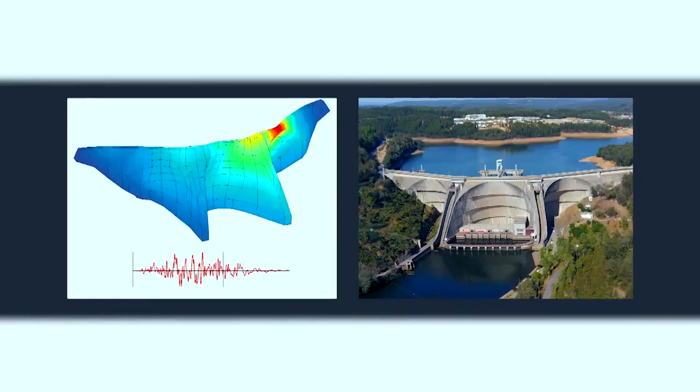The Portuguese National Laboratory for Civil Engineering is a world-renowned research institution founded in 1946 as a state research institute, with the mission of developing applied research in the field of civil engineering and connected areas. Over the last 7 decades, LNEC has conducted research projects and consultancy work in more than 40 countries, in all continents.

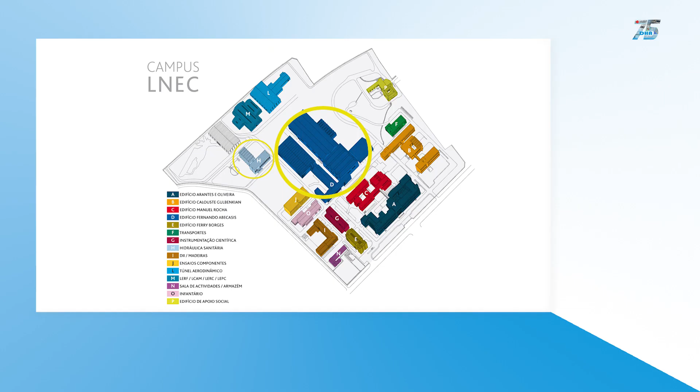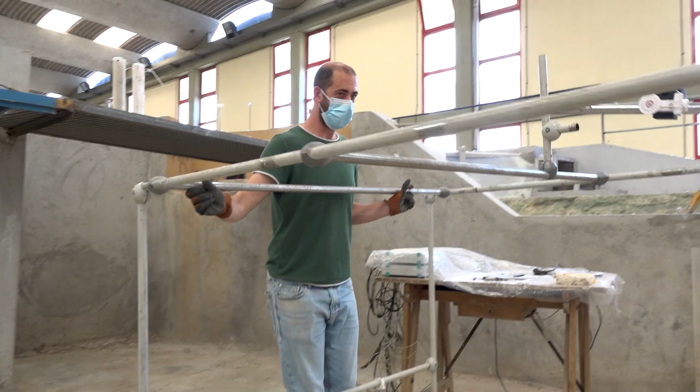DHA, the Hydraulics and Environment Department, was established in 1948. It is composed of a highly qualified team of researchers and technicians who work together to address a wide range of challenges related to the water cycle.

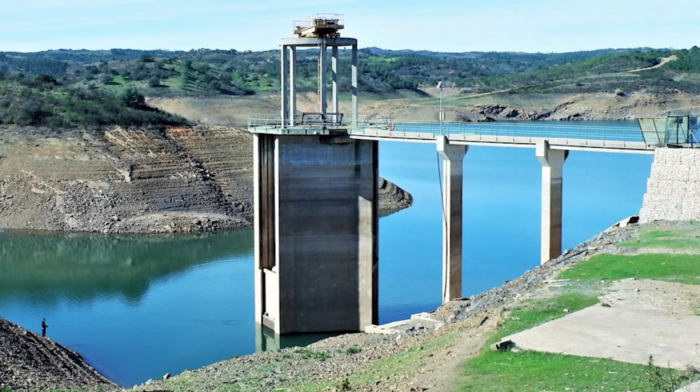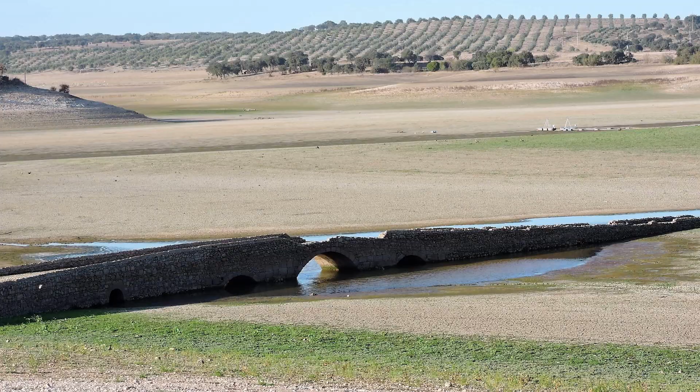Research and consultancy at DHA covers water resources management, coastal management, hydraulic and maritime structures, urban water cycle, groundwater, and information technologies applied to water and environment challenges, aiming to contribute to water and environment sustainability within the climate change context.

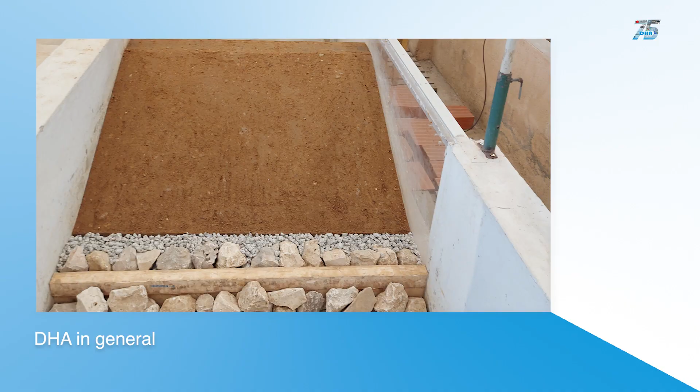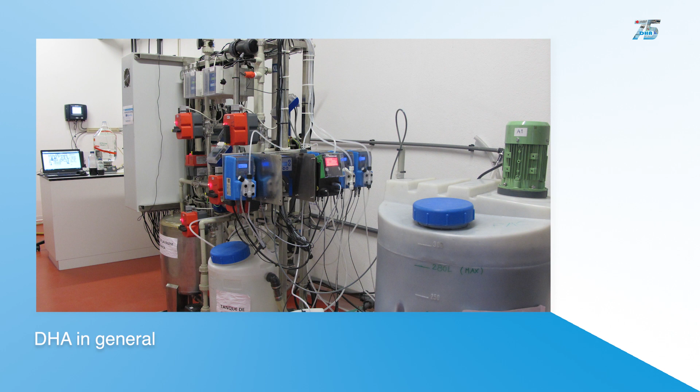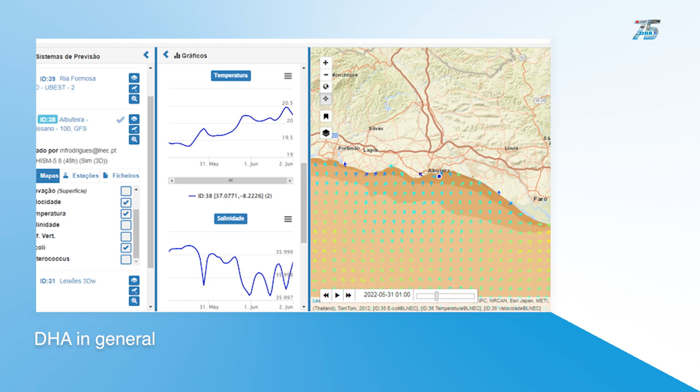DHA holds unique experimental facilities for physical modeling of dams, ports and other maritime, hydraulic, and hydrogeological structures, for water quality characterization, and lab and pilot plants for development and optimization of conventional and advanced water treatment, as well as state-of-the-art research capacity to develop and apply numerical models and forecast systems in all hydraulic and water-related environment fields.

Over the years, DHA has built a world-renowned reputation in the field of hydraulics and environmental engineering, evidenced by a vast number of scientific papers, technical reports, and books in a broad range of topics, and their expertise has been sought after by governmental agencies, water management bodies, research partners, non-governmental organizations, and private companies around the world.

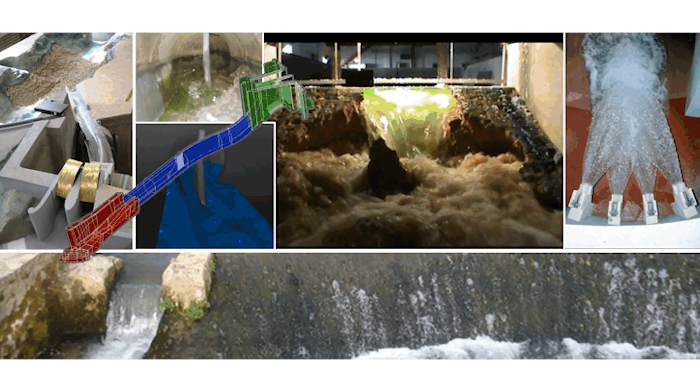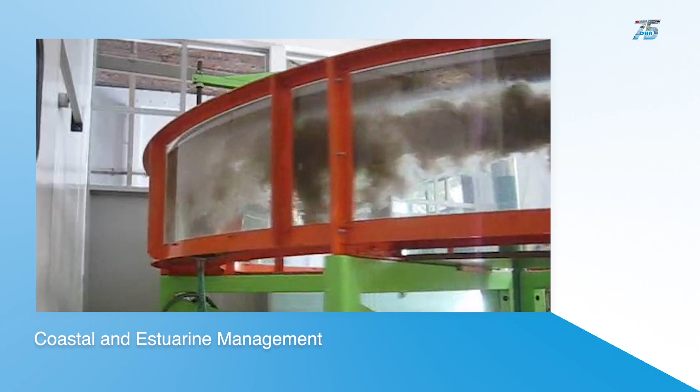Nowadays, the department's research covers a broad range of topics. In the domain of coastal and estuarine management, studies are carried out on waves, tides, currents, sediment transport processes, and biogeochemical processes in coasts and estuaries.

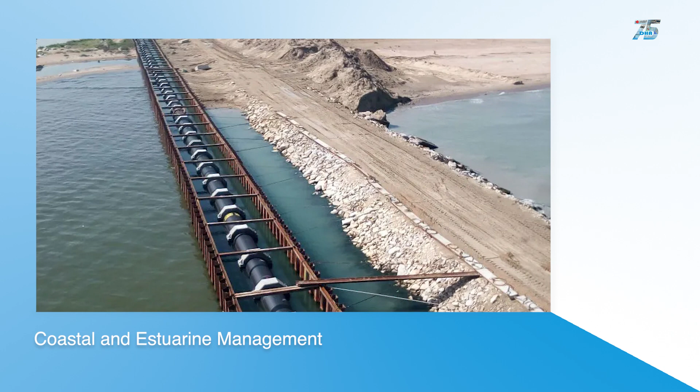This assists in the development of solutions for coastal protection and rehabilitation, management of the coastal risks of erosion and flooding, mitigation of climate change impacts such as sea level rise in coastal cities, stability of tidal inlets, improved design of estuarine, coastal and submarine infrastructure, and assessment and prediction of water quality.

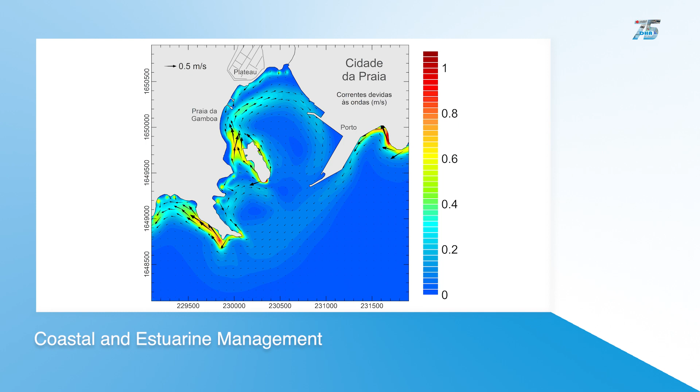These studies are mainly developed using advanced numerical models, supported by in situ measurements.

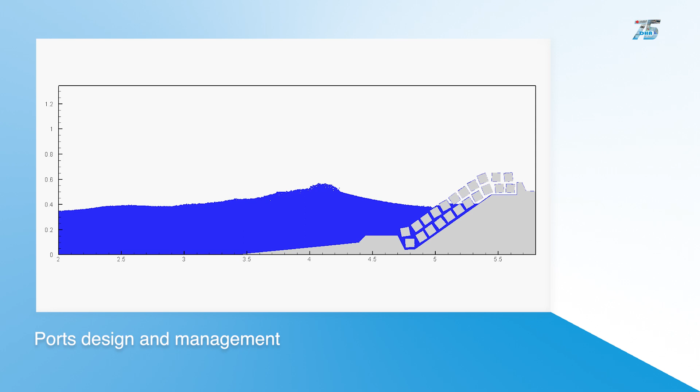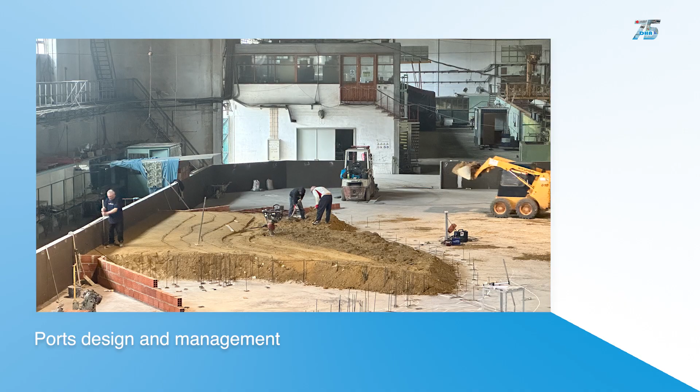Another important area of expertise is the development of effective solutions for the design and management of ports, and the safety of marine transportation. To this end, a huge testing hall with an area of 6,500 square meters, mostly occupied by wave flumes and basins, is used to test under-scaled physical models of wave propagation over real sea bottom configurations and their interaction with marine structures, sediments, and ships.

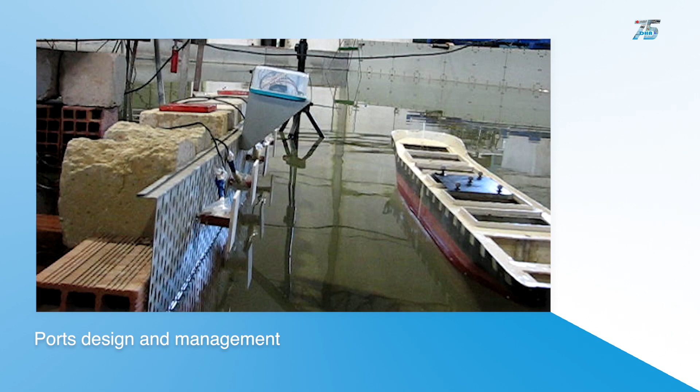Wave generators are used in those flumes and basins to generate the wave conditions that are the main driver for those studies. The facilities also include a large sediment transport flume and several smaller flumes capable of simulating the movement of sediments in rivers, coastal areas, and offshore environments.

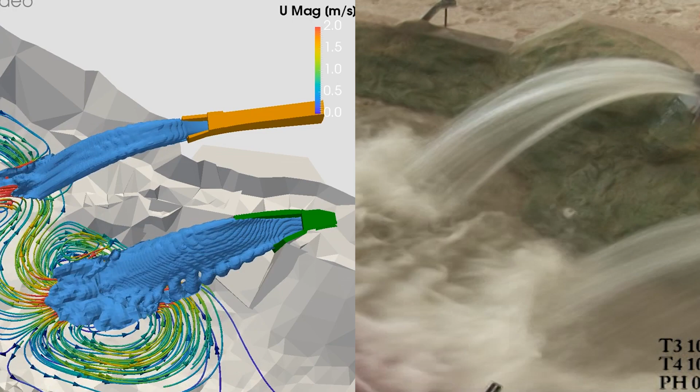Under the subject of hydrology and water resources management, studies of the hydrological cycle, drought and water availability, flood risk management, and the impacts of climate change on water resources are carried out. Also, the development of innovative solutions for managing water resources sustainably is based on advanced modeling and data analysis techniques.

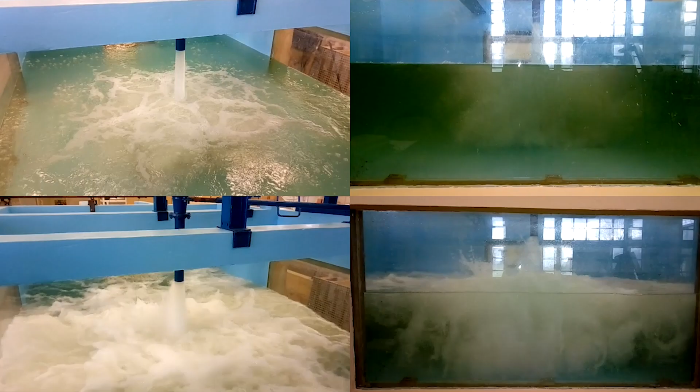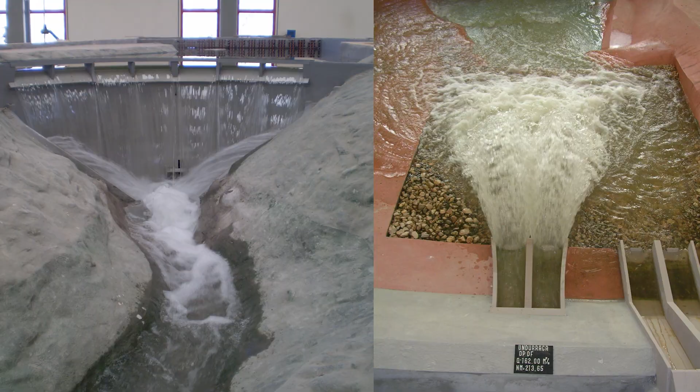Several experimental facilities are used to support these studies, for instance, to study the flow characteristics and its interaction with different types of hydraulic structures, as well as to test the performance of different designs. Several large-scale models of hydraulic structures such as dams, spillways, and channels are used. Those are nowadays complemented with advanced numerical modeling.

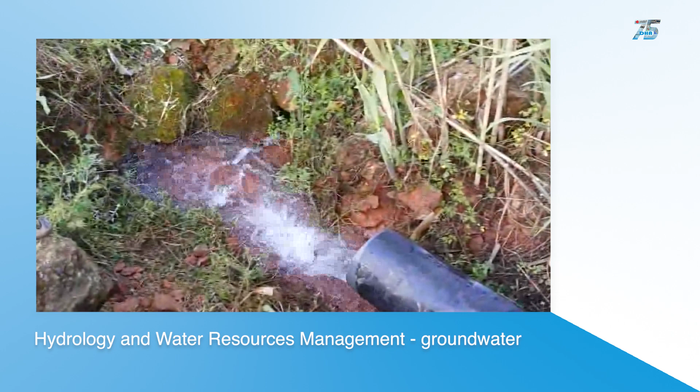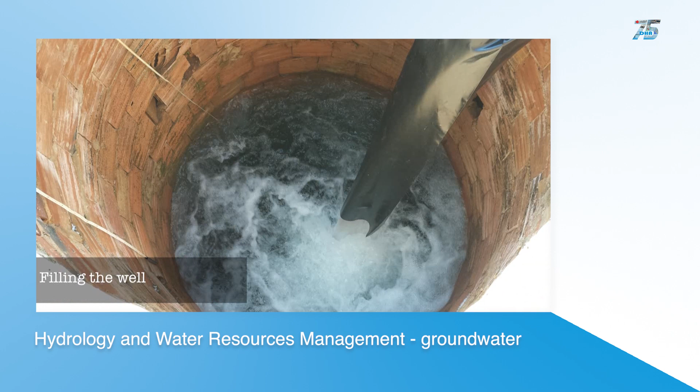Concerning groundwater, several studies are being developed including field monitoring, laboratory soil column tests and large-scale aquifer infiltration and contaminant leaching tests. The structures can also act as a managed aquifer recharge simulator to enhance the quality of secondary treated wastewater during its infiltration through composed soil layers.

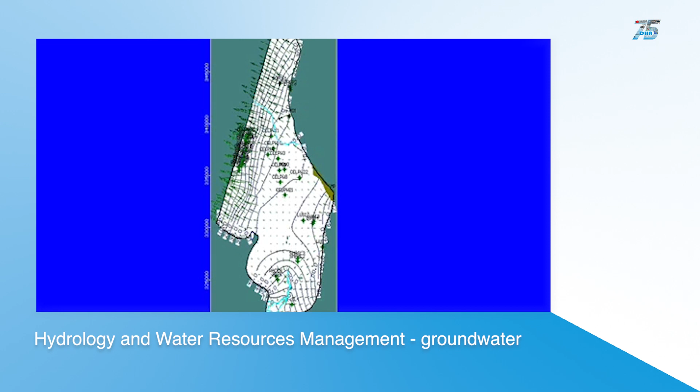Most studies developed use numerical models to interpret the current situation and to model future scenarios, helping to support the management options that lead to a more sustainable use of water resources.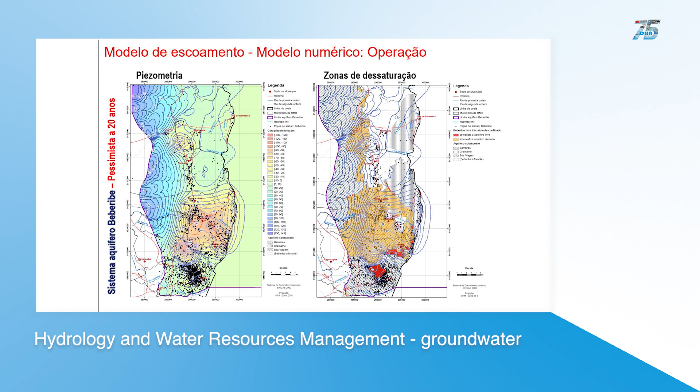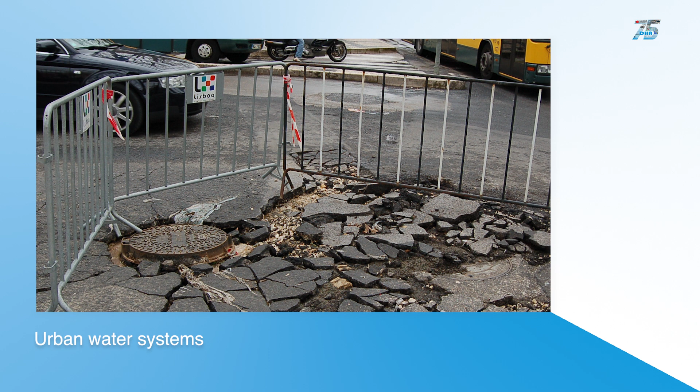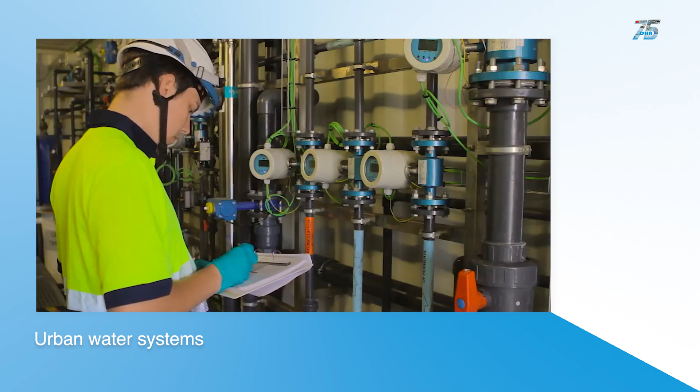The research, development, and innovation on urban water systems has a problem-driven approach in the field of public water supply, wastewater and stormwater services and systems, grounded on 4 research lines: water and energy, infrastructure asset management, water quality, treatment and reuse, reliability, safety and resilience of urban water systems.

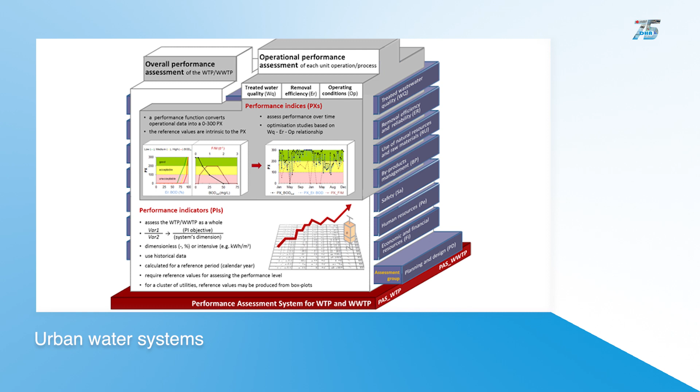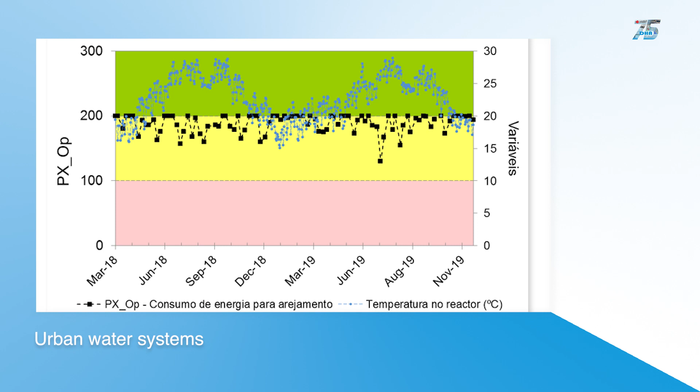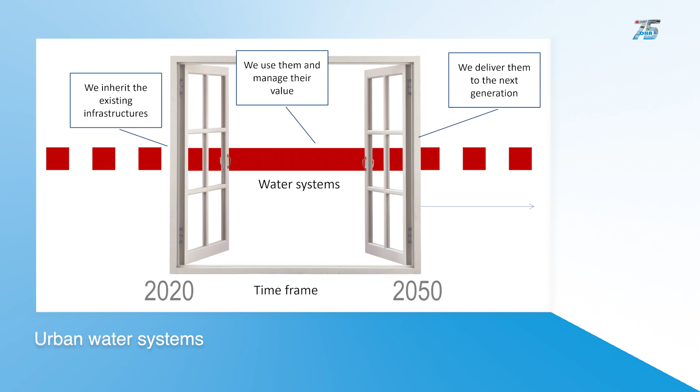It is focused on the production and transfer of knowledge, methods, and technology to the urban water sector, aiming at increasing the service's effectiveness, efficiency and sustainability, and pursuing the anticipation of innovative solutions to current and emerging challenges such as ensuring high-quality services at affordable prices, now and for future generations, promoting the circular economy and the efficient use of resources, particularly water and energy, the system's adaptation ability and resiliency towards rapid and severe changes exacerbated by climate change, and the control of contaminants of emerging concern.

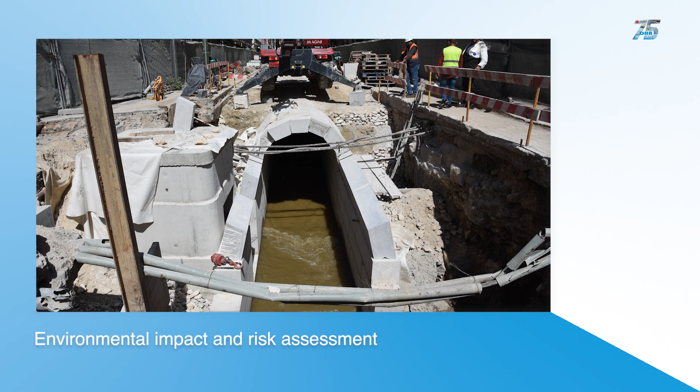Environmental impact and risk assessment research helps projects to be designed and implemented in an environmentally sustainable way, foreseeing the potential effects that different solutions, or even activities, may have on the environment, namely on water quality, soil erosion, and habitats. New approaches are considered to protect, sustainably manage, and restore natural or modified river, estuarine, and coastal ecosystems.

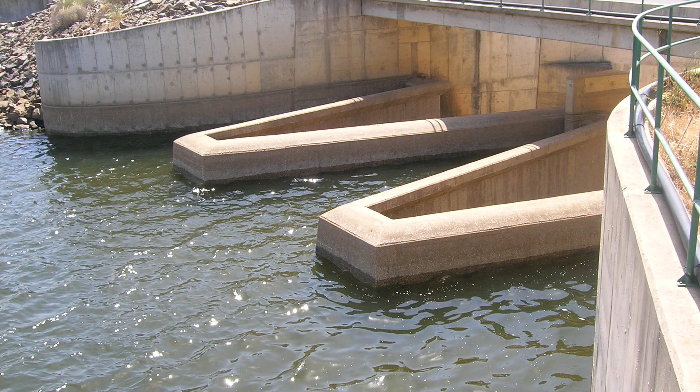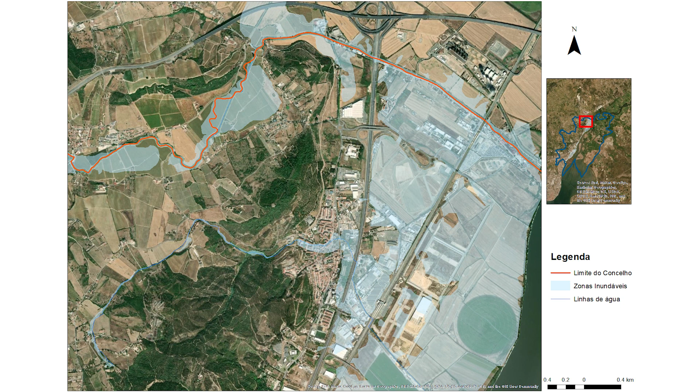The study of hydraulic infrastructures and water bodies' vulnerability to climate changes is achieved within a climate change adaptation research topic, which, overall, ends up being present in all lines of research. This research encompasses the studies on floods and droughts, sea level rise, and wildfires, aiming at developing intelligent systems for risk and emergency management, including early warning systems and adaptation strategies to mitigate these impacts.

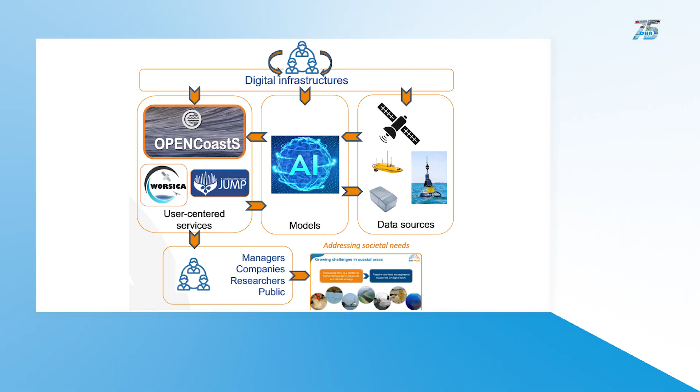The integration of all these research areas is promoted by the IT Research Group, through information technologies and computational applications to address current and future societal challenges. Research areas include real data monitoring and real-time forecasting systems, WebGIS portals, artificial intelligence models for data quality assessment and water dynamics prediction, and IT services to address societal problems such as flooding, water body contamination or risk management.

These sophisticated tools aim to contribute to a better understanding of the complex water dynamics and to the development of innovative solutions for the sustainable management of water resources.

Today, the Department of Hydraulics and Environment of LNEC continues to be at the forefront of research in the field of hydraulics engineering and environment.

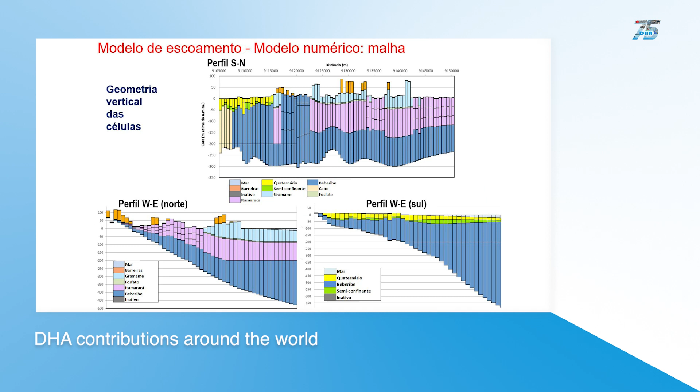Also worthy of mention are the various actions to support the construction of works interventions in the natural environment through the application of numerical models.

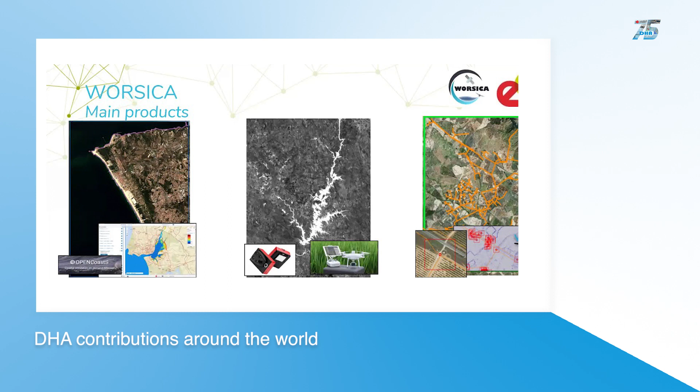It has developed many IT-based tools to address current and future societal challenges. Examples include OPENCoastS, OSOM, HIDRALERTA, WORSICA and Mosaic services, most of them freely available to access to anyone, following an open science vision to better serve the society.

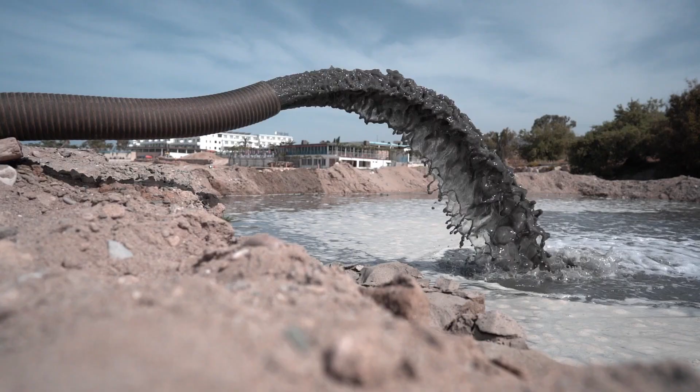Indeed, DHA intends to continue playing a key role in society in general, addressing some of the main challenges of the 21st century, such as climate change and anthropogenic interventions, impacts over water scarcity and contamination, risk and sustainable development. Some key areas for future work include developing strategies and solutions to support communities and infrastructure to adapt to the impacts of climate change.

These include sea level rise, flooding, water scarcity and water quality deterioration, forest fires, coastal erosion, and changes in rainfall patterns. Another concern is the development of new approaches for the sustainable management of conventional and alternative water resources.

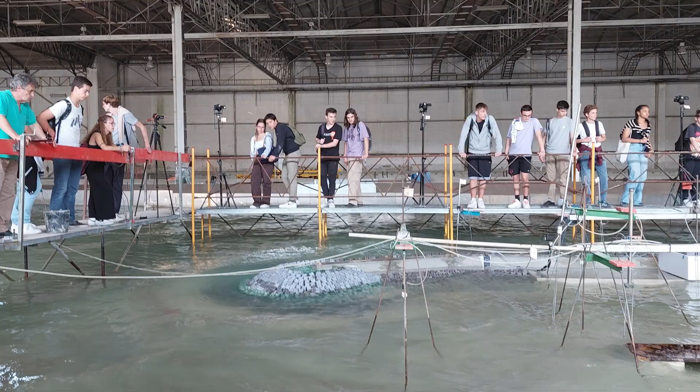namely those that can cope with the binomial of increasing demand versus decreasing availability and decreasing quality versus increasing water quality requirements. New methods for assessing the environmental impact of infrastructure projects and land use changes, and for designing measures or solutions to mitigate negative impacts are also envisaged, as well as the development of innovative solutions.

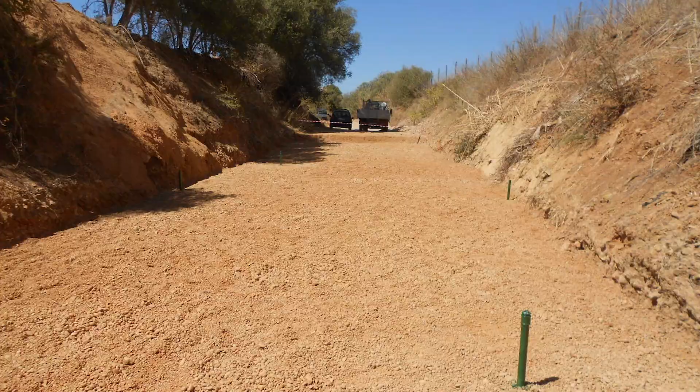Nature-based solutions are a promising concept for climate adaptation and resilience enhancement that need further development. And covering all these areas, research in emerging technologies such as artificial intelligence, remote sensing and big data is included to improve the accuracy and efficiency of the studies undertaken.

In the future, DHA will continue to merge innovative research and cutting-edge technology, taking advantage of its multidisciplinary knowledge and capacity to integrate multiple sciences into innovation.